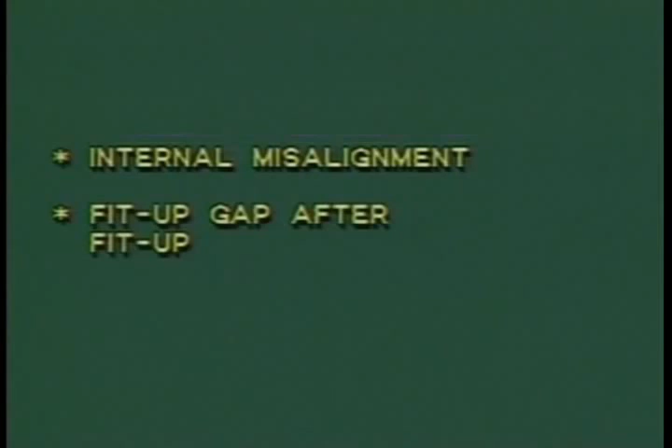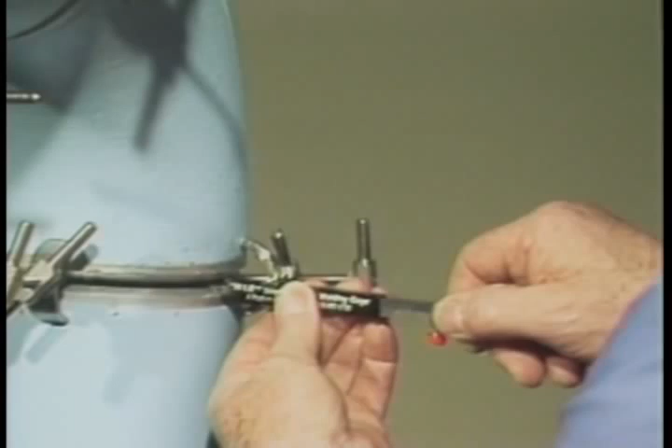First, we'll measure an internal misalignment. Loosen the retaining screw and extend the legs beyond the housing of the gauge. Now insert the legs into the fit-up gap and rotate the gauge 90 degrees. With the gauge housing held squarely against the pipe wall, the internal misalignment can be read from this scale.

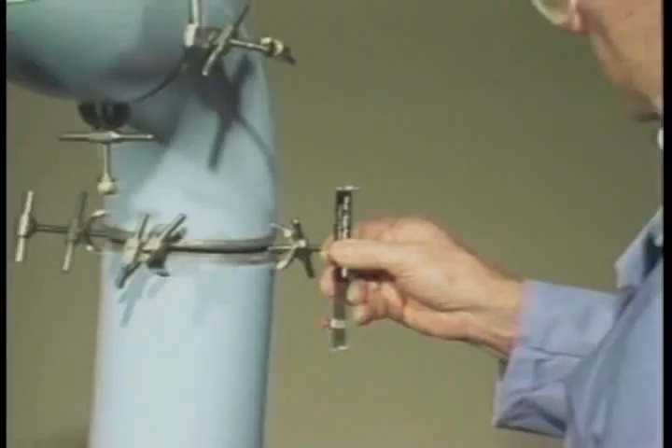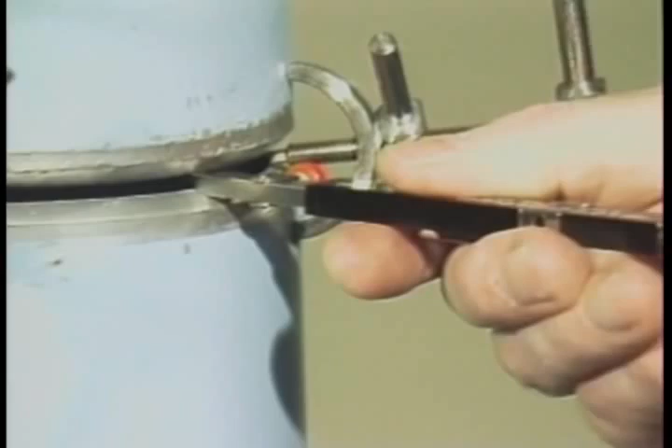We can use the opposite end of the gauge to measure the fit-up gap. First, loosen the retaining screw and insert the gauge into the gap so that the leg with the less taper will rest on the pipe bevel. The other leg can be extended until it contacts both pieces of the pipe. Now tighten the retaining screw and remove the gauge to read the fit-up gap measurement on the scale.

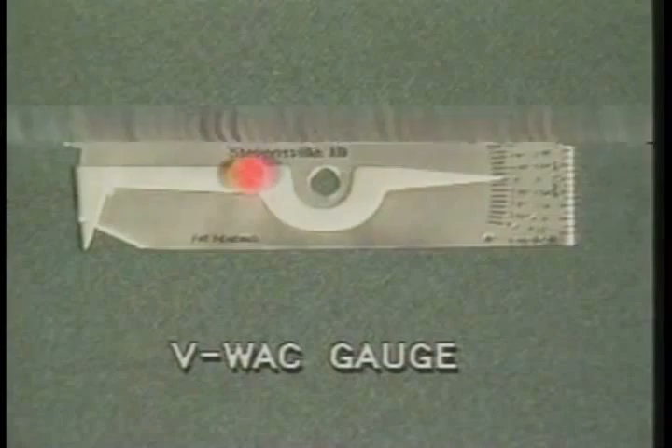The V-WAC gauge is a tool which allows you to perform several different types of measurements and to compare weld defects. With this tool you can measure undercuts or pits, reinforcement of butt welds, outside misalignment, surface porosity per linear inch, and compare surface porosity for size.

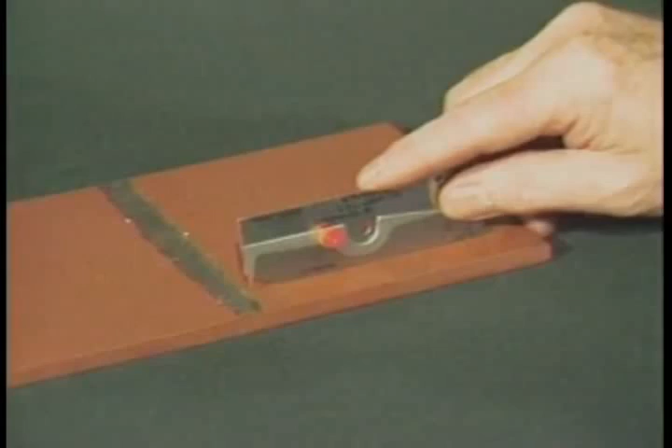To measure an area of undercut, set the bottom of the gauge on the base material. Set the tip of the pointer into the area of undercut and read the amount of undercut from this scale. The locking screw can be tightened to hold readings for future reference.

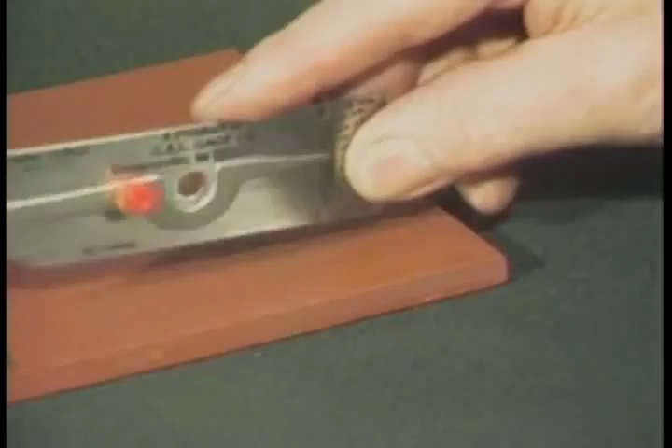To measure the weld reinforcement of a butt weld, set the bottom of the gauge on the base material and set the tip of the pointer on the top center of the butt weld. Read the height of the weld on this scale.

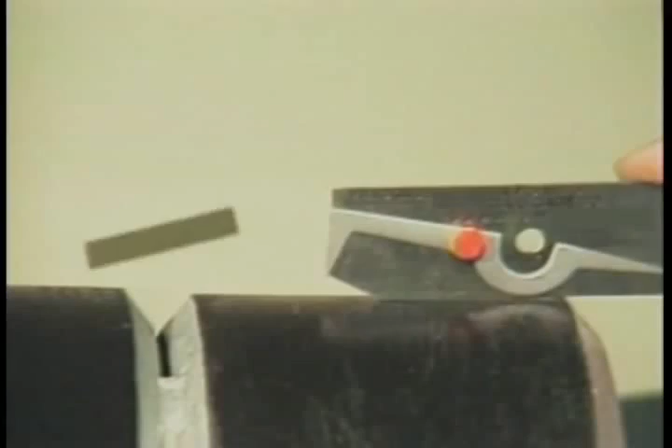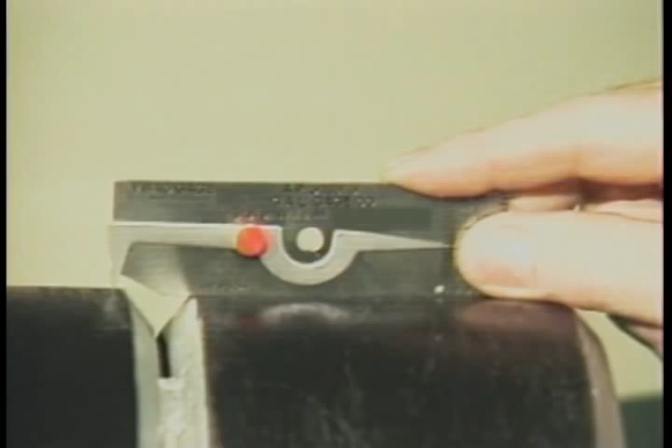To measure outside misalignment, set the bottom of the gauge on one member or spool piece. Extend the tip of the pointer to the adjacent spool piece and press the tip of the pointer up or down to make contact. The reading from this scale will give you the amount of misalignment.

To measure aligned surface porosity in 1 linear inch, place the end of the gauge with the scale along the length of the weld to be examined. Read the amount of aligned pores in 1 linear inch from the scale, with 1/16 of an inch increments.

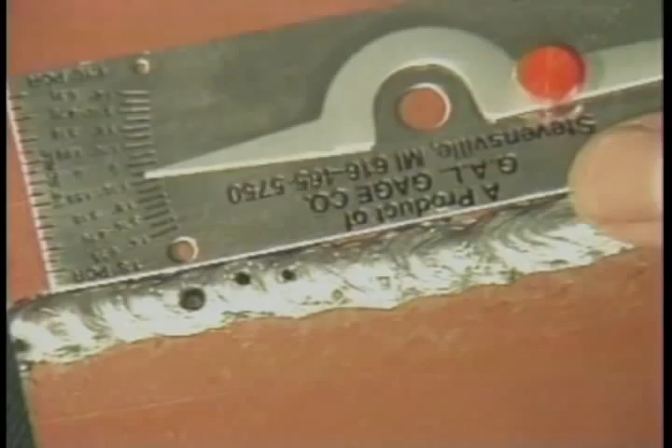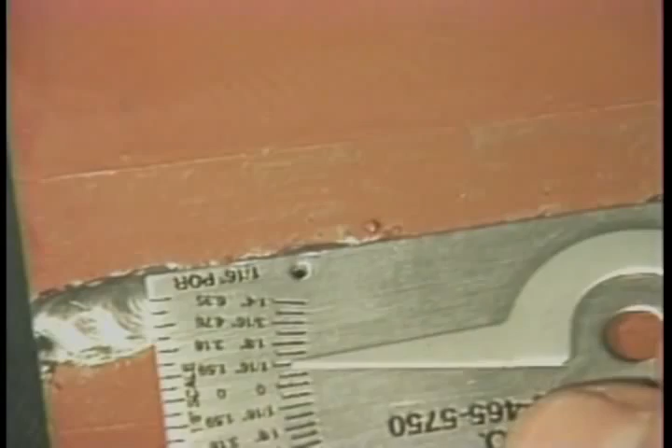To compare surface porosity for size, place either the 1/8 inch or the 1/16 inch hole in the gauge next to the pore in the weld to be checked. Compare the size of the pores to the holes in the gauge.

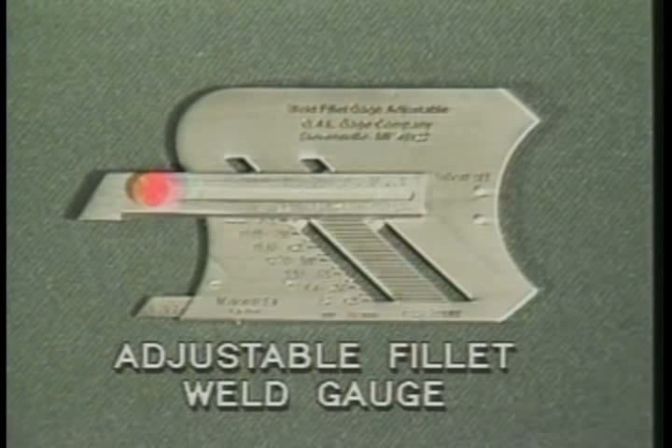The adjustable fillet weld gauge was designed so that just one gauge can be used to check 29 different sizes of fillet welds, equal or unequal in size. With this gauge, you can measure fillet weld leg lengths from 1/8 of an inch to 1 inch in 1/32 of an inch increments, desired throat thickness of fillet welds, and unequal-legged fillet welds.

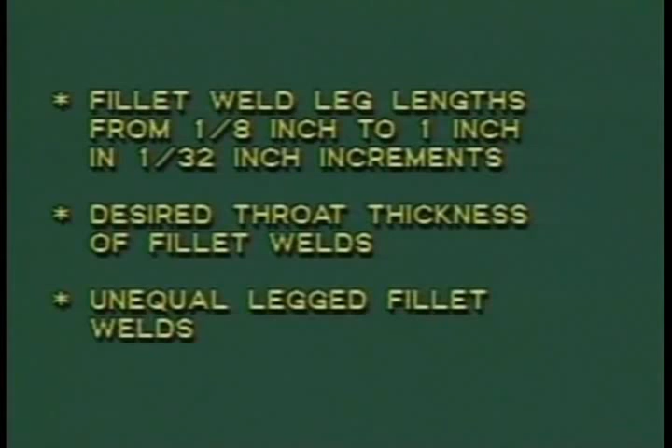The strength of a fillet weld is based on the effective throat thickness, which is the shortest distance from the root to the face of the weld. For an equal leg, 45-degree fillet weld, the throat is 707 thousandths, which is the sine of 45 degrees times the leg size of the weld.

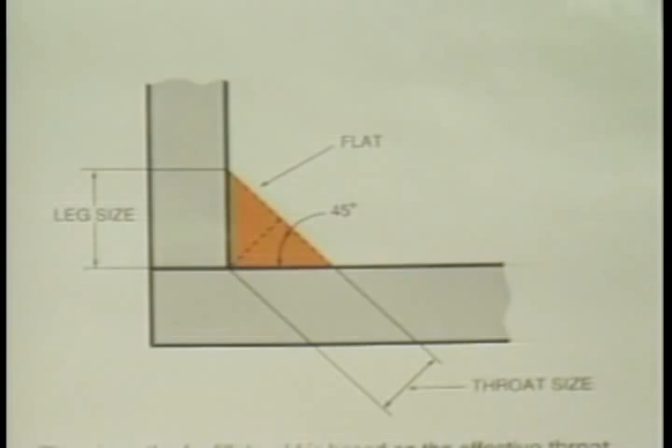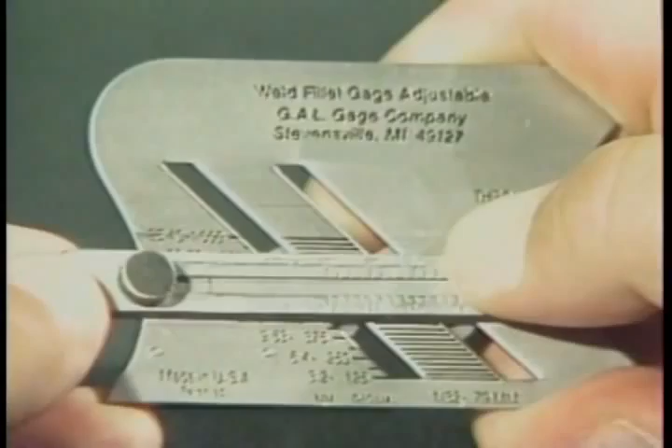To measure equal-legged fillet welds to size, as required from drawings or specifications, select the appropriate size. In this case, a 3/8 of an inch fillet weld is required. Set the 45-degree slide at 375 thousandths of an inch, or 3/8 of an inch on the scale.

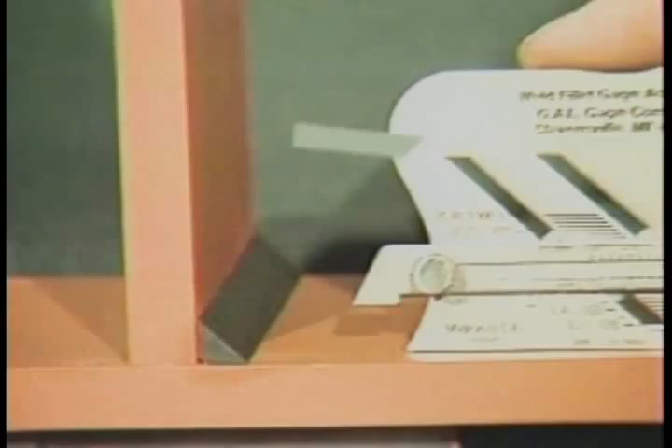Place the gauge on the horizontal member. Slide forward until the bottom of the irregular curved portion touches the toe of the weld. At this point, the bottom of the 45-degree slide will contact the toe of the weld on the vertical member, which indicates that a 3/8 by 3/8 of an inch fillet weld has been verified according to specifications.

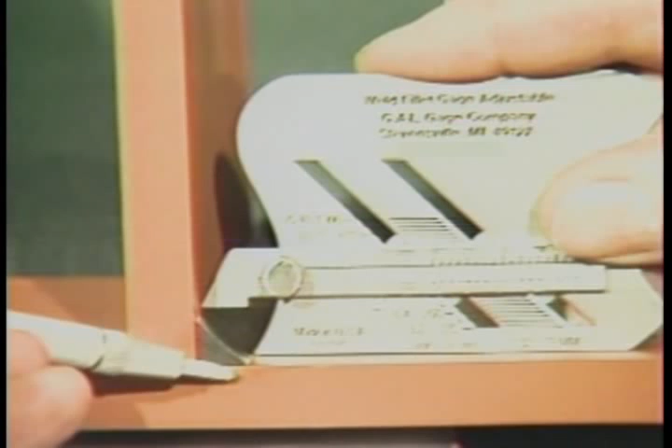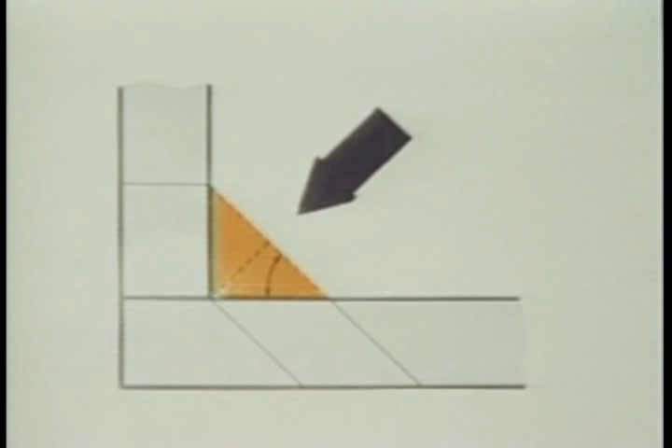To measure throat thickness, a welder must determine weld leg sizes. If 3/8 of an inch fillet size is required, use the 707 thousandths times leg length formula in determining the throat thickness. For example:

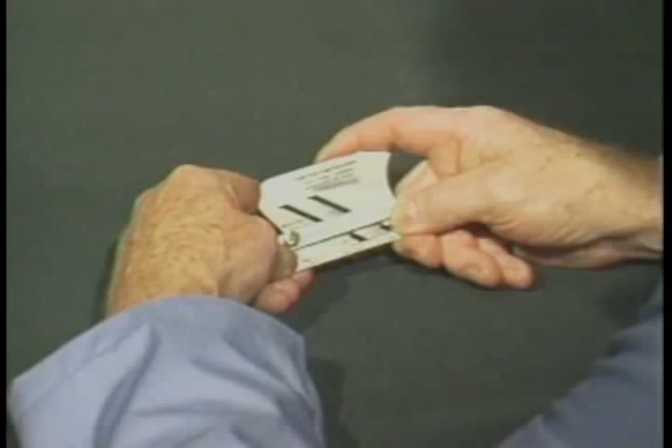707 thousandths times 375 thousandths equals 265 thousandths. Round this off to the nearest fraction in 1/16 of an inch, which would equal 250 thousandths, or 1/4 of an inch throat thickness. To determine this measurement, move the slide to the center of the gauge at the throat and check position. Extend the pointer to 250 thousandths of an inch and lock the screw.

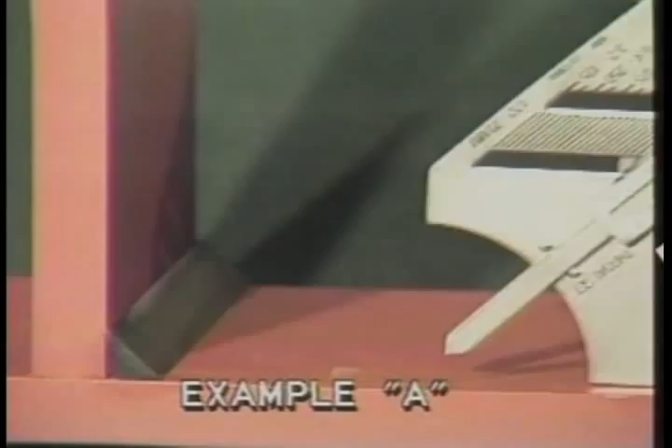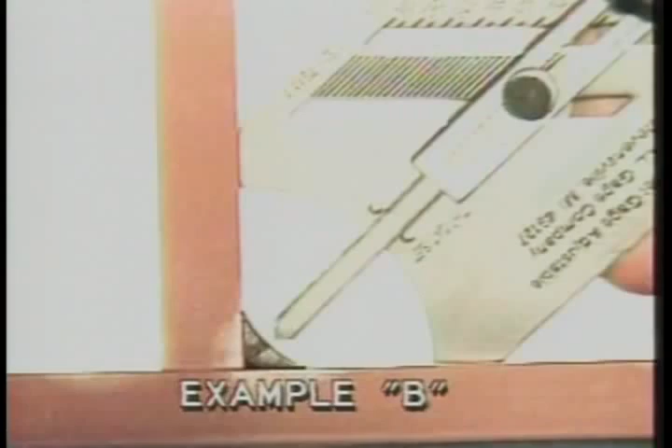Place the gauge so that the 45-degree legs touch horizontal and vertical members. The point of the extended slide should just touch the face of the throat, as shown in example A. If it does not touch, as shown in example B, more weld is required.

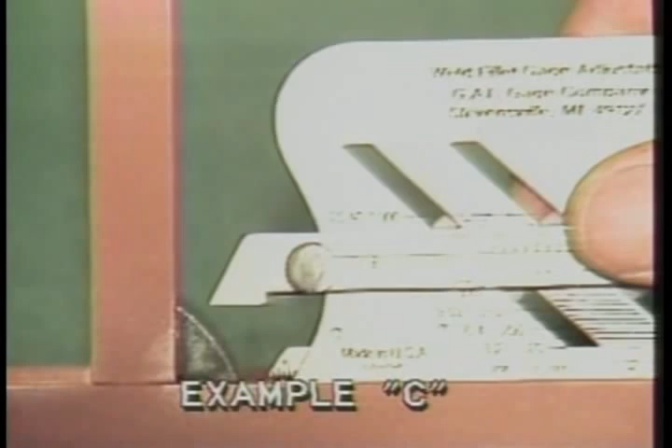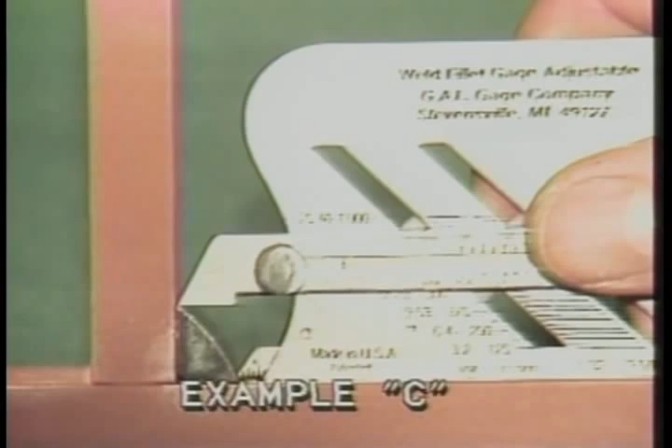To measure unequal-legged fillet weld size, determine from specifications the size required. In this case, a 1/2 inch by 3/8 inch weld is required, as shown in example C. Set the 45-degree sliding scale at 1/2 inch and set the small back scale at 3/8 of an inch and lock the screw. Then proceed in the manner just described for the equal-legged fillet weld.

Another type of weld defect encountered is undercut that is transverse to the primary stress in the part that is undercut.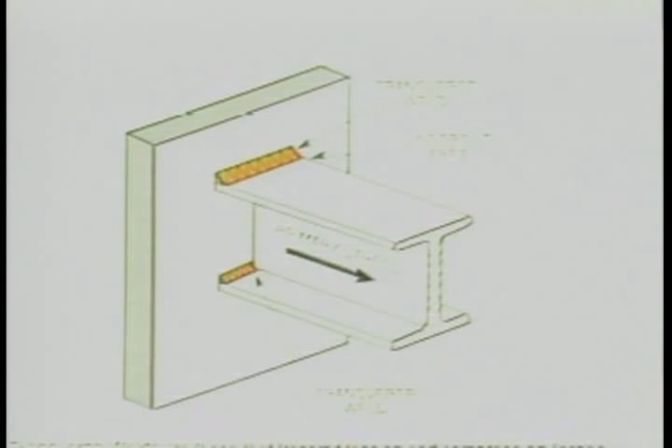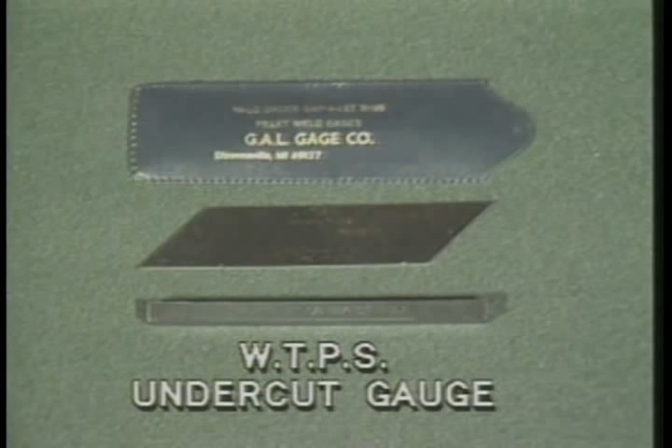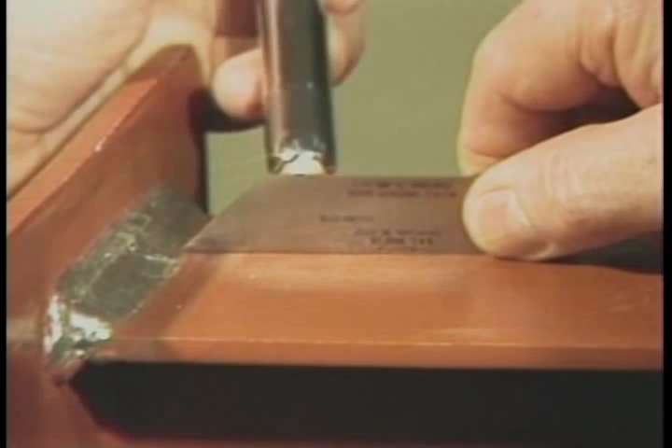To measure this weld defect, the weld transverse primary stress, or WTPS, undercut gauge is used. To measure undercut, place the gauge on the surface of the member next to the undercut area. Insert the 10-thousandths tip into the undercut. With the aid of illumination, determine if light can be seen between the parallel surfaces of the gauge and the base material. If light can be seen between the two parallel surfaces of the gauge and the base surface, the area is acceptable. If no light can be seen, the area is just at 10-thousandths, or rejectable.

The WTPS gauge kit includes a precision calibration block for periodic calibration.

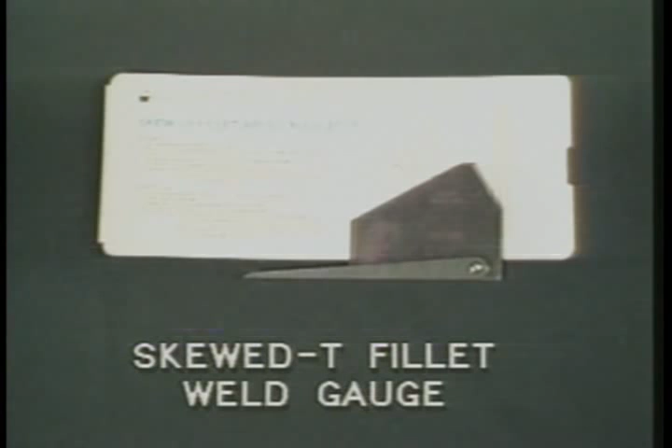The final gauge demonstrated in this program will be the skewed T fillet weld gauge with calculator. Normally, we think of members being welded together at a 90-degree angle to each other. A special condition exists when members come together and are welded at angles other than 90 degrees, and fillet welds are used to make the connection.

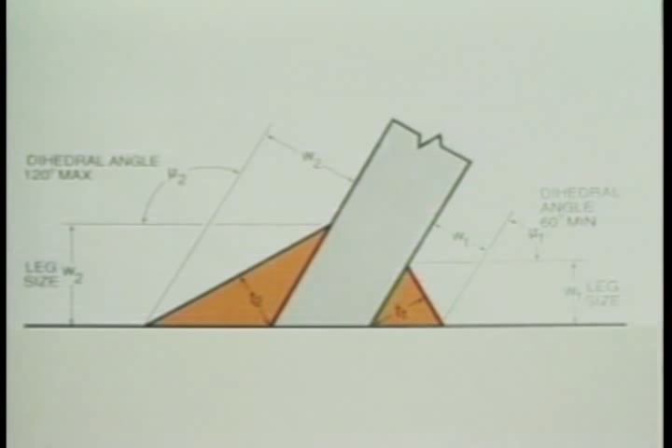These conditions are called skewed T-joints. The angles involved usually are at a 60-degree angle minimum on the acute side and 120-degree angle on the obtuse side. The 60-degree minimum angle requirement is specified on the acute side of the joint to allow for access of the electrode by the welder.

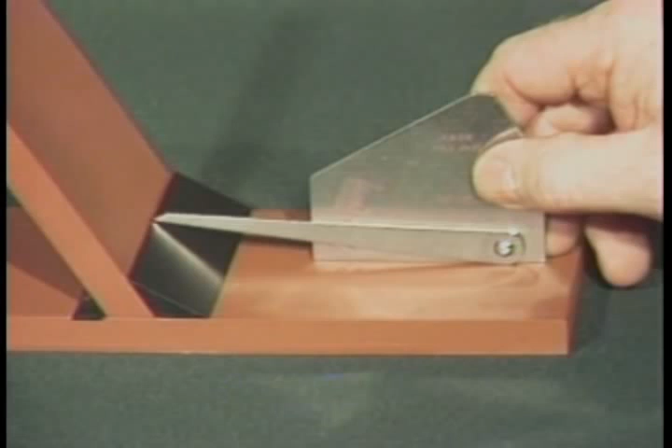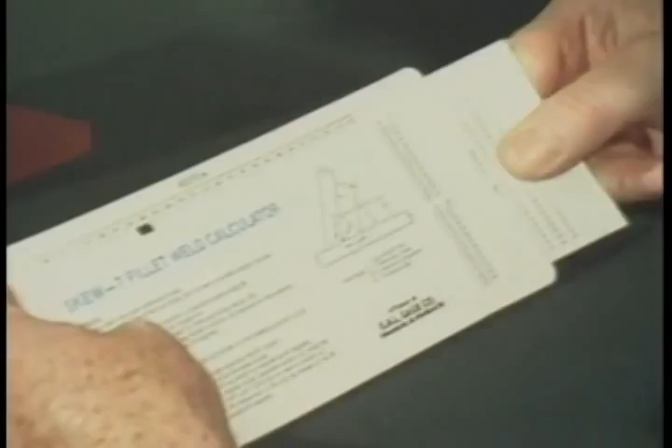Here we are measuring the W dimension of a fillet weld in the skewed T-joint from the obtuse side of the member. Here we are measuring the W dimension of a fillet weld in a skewed T-joint from the acute side of the member. The W dimension that is used for the inspection of the skewed T fillet weld sizes can easily be found by using the calculator. Leg size can also be obtained by using this method in conjunction with the gauge.

This concludes the presentation of the various weld inspection gauges used by the personnel responsible for the dimensional requirements in conformance with the national welding standards.